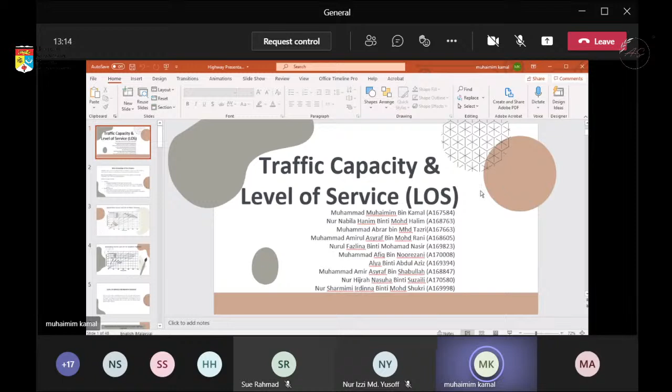Kita mula dengan traffic capacity. Apa yang dimaksudkan dengan kapasiti itu sendiri adalah the maximum number of vehicle in a road that can pass by a given unit time. Usually kita guna kapasiti ni dalam bentuk PCE, which is passenger car equivalent. Kita selalunya akan tukar unit jenis kenderaan tu ke dalam bentuk satu unit, contohnya unit bagi kereta PCE adalah 1.0.

Kemudian bagi level of service, kita takrifkan sebagai maximum hourly rate that can cross a point on the road section according to the road traffic and control condition. Level of service ni ada 6 jenis, mula daripada A sampai ke F, tapi biasanya kita akan gunakan level A sampai level E sahaja kerana level F telah dianggap gagal. Level A merupakan kondisi yang paling optimum kepada pengguna jalan raya kerana aliran trafik adalah paling lancar pada level A.

Bagi silibus yang kami akan present hari ini, kami akan fokuskan pada dua jenis jalan, which is freeway dan juga multi-lane highway. Freeway ni adalah jalan yang didesain untuk kenderaan yang bergerak laju, dan tidak boleh ada sebarang gangguan seperti traffic signal, intersection ataupun at grade crossing. Manakala multi-lane highway merupakan highway yang mempunyai lane lebih daripada dua, boleh ada gangguan dalam bentuk traffic light ataupun light intersection, tapi tak boleh lebih daripada 3 km.

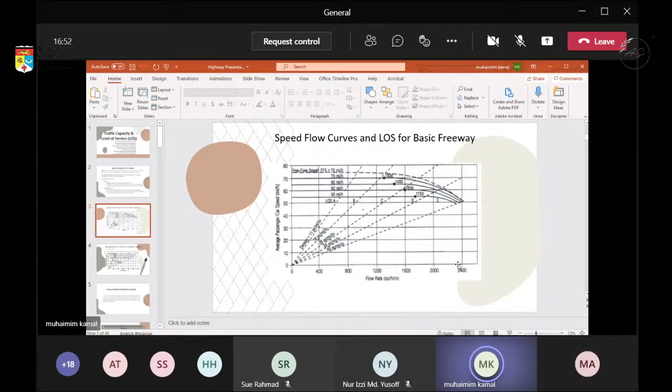Manakala kalau kita tengok pada level of service bahagian E, aliran trafik agak rendah, maknanya ada gangguan dalam trafik dan jalan tersebut tidaklah berapa bagus. Dapat juga kita lihat ada peningkatan bagi flow rate selepas 1300 pc/h/ln, maknanya semakin meningkat flow rate, semakin berkurang average passenger car speed. Lagi tinggi aliran trafik selepas 1300, maknanya kelajuan kenderaan akan semakin berkurang. Ini adalah speed flow curve dan LOS untuk basic freeway.

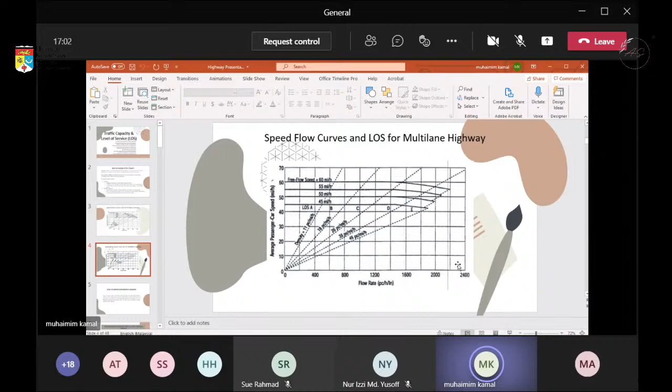Kita juga ada speed flow curve dan LOS bagi multi-lane highway. Jadi kita perlu merujuk kepada graf tersebut untuk kedua-dua jenis jalan. Okay, seterusnya bagi level of service.

Level of service for freeway segment. Level of service is a qualitative measure both of operating condition within the traffic system and how these conditions are perceived by driver and passenger.

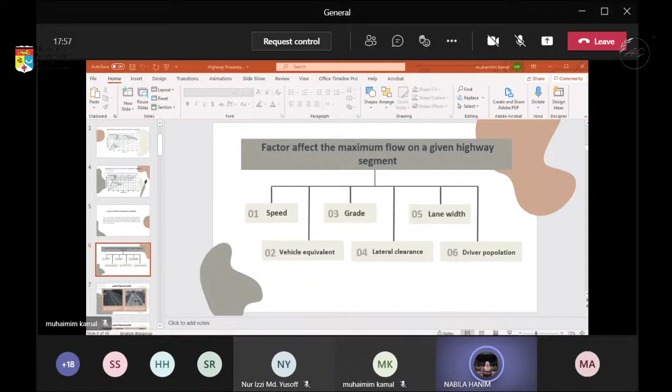There are 6 factors affecting the maximum flow on a given highway segment: speed, vehicle equivalent, grade, lateral clearance, lane width, and driver population.

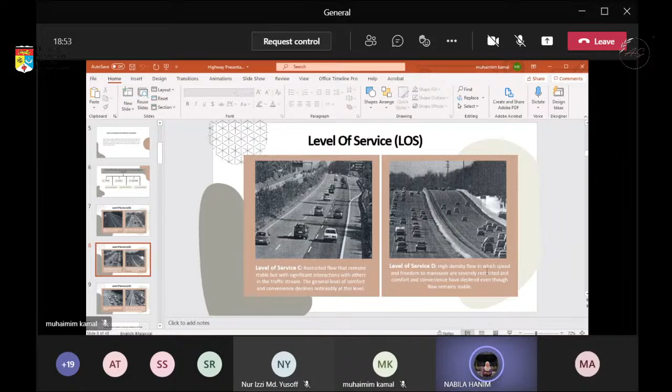For level of service C: stable flow and traffic interaction, so they have a junction. For level of service D: unstable flow, high density, and movement restriction.

For level of service E: unstable flow, lower speed, volume nearly equal to capacity, and little freedom. The last one is level of service F: unstable flow, no freedom, traffic volume can drop to zero, and stop and go.

To calculate the flow rate for a basic freeway section, we use this formula where VP equals 15-minute passenger car equivalent flow rate, V equals hourly peak vehicle volume in one direction, PHF is peak hour factor, N is number of travel lanes in one direction, FP is driver population factor with range of 0.85 to 1.0, and FHV is heavy vehicle adjustment factor.

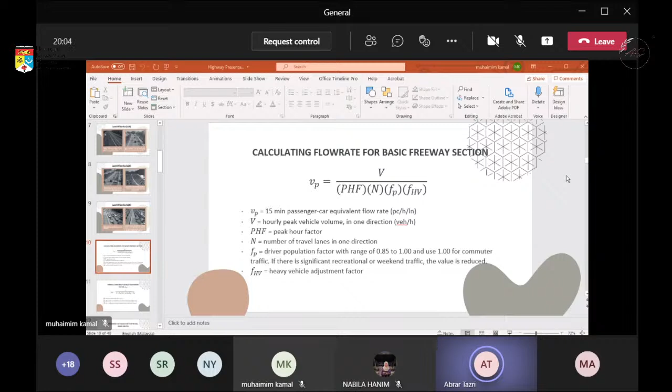To calculate the heavy vehicle adjustment factor, we use another formula where ET is passenger car equivalent for trucks and buses, and ER is passenger car equivalent for recreational vehicle.

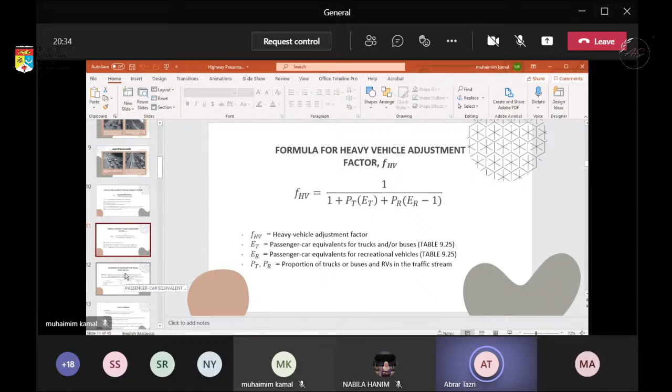To get the passenger car equivalent for truck and buses and recreational vehicle, we use the table in table 9.25. In this table we can see the factor for ET and ER in three types of terrain: level, rolling, and mountainous.

In level terrain, the heavy vehicle can maintain the same speed as passenger cars. In rolling terrain, heavy vehicles reduce their speed lower than passenger cars, but do not travel at crawl speed. In mountainous terrain, the heavy vehicle operates at crawl speed for a significant distance or frequent interval.

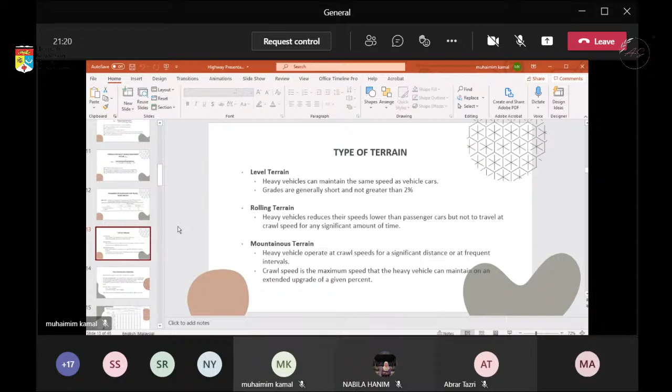For PCEs for specific upgrades: specific grades are analyzed individually for downgrade and upgrade. Passenger car equivalent is used to represent the variant effect of mixed vehicle type on saturation flow by converting a traffic stream comprising of various vehicle types into an equivalent traffic stream comprising entirely of passenger cars. The segment is considered either as a grade of constant percentage or as a series of grades.

The average weight to horsepower ratio for trucks is 55 to 70 kilogram per horsepower. For recreational vehicles, it is 14 to 28 kilogram per horsepower.

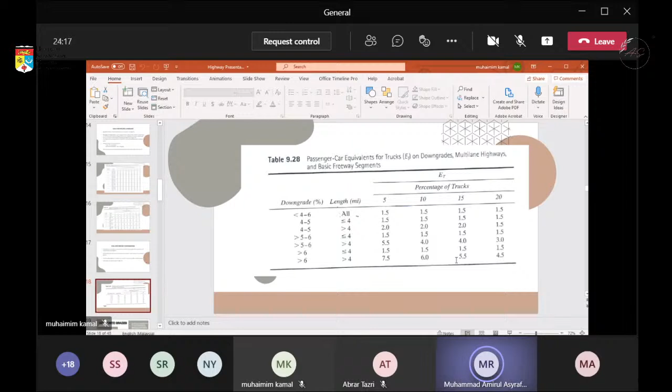For composite grade, when a segment of freeway consists of 2 or more consecutive upgrades with different slopes, the PCE of heavy vehicles is determined using one of two techniques. The first technique determines the average grade of the segment by finding the total rise in elevation and dividing by the total horizontal distance. Use table 9.26 and 9.27.

This is valid for conditions where grades in all subsections are less than 4% or the total length of the composite grade is less than 1,200 meters. The second technique is to estimate the value of an equivalent continuous grade GE. This technique should be used if any single portion of the consecutive grades exceeds 4% or if the total length of grade exceeds 1,200 meters.

Truck acceleration curves are used based on a vehicle with an average weight to horsepower ratio of 90 kg per HP, which represents a somewhat heavier vehicle than the typical truck of 55 to 70 kg per HP used to determine PCE values. Next, this is the example using average grades.

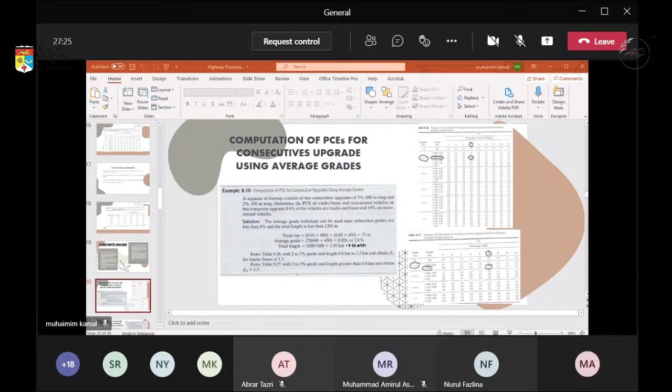The second technique uses the performance curve. Example 9.11: a consecutive upgrade consists of 2 sections, the first of 2% grade and 1,500 meters long, and the second of 6% grade and 1,500 meters long. Trucks comprise 10% of traffic and recreational vehicles comprise 6%. Determine the equivalent grade and the PCEs.

First, since both grades exceed 1,200 meters, the average grade technique does not apply. We use the performance curve. First, plot the 2% curve intersecting with 1,500 meters, which is 5,000 feet, and we got point number 1, which is 75 km per hour, 0.6 miles.

Since 75 km per hour is also the speed of the truck at the beginning of the 6% grade, draw a line horizontally at 75 km per hour that intersects the 6% grade curve, and we got point number 3. The reference distance is located on the horizontal axis at point number 4. Find the point on the horizontal axis that has a value 1,500 meters greater than point 4, and we got point number 5, meaning the distance between number 4 and 5 is 5,000 feet.

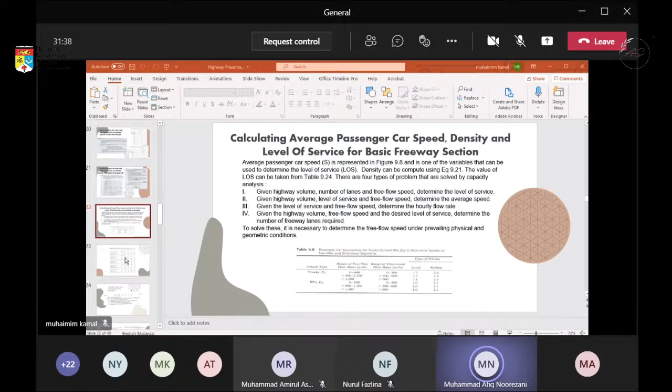This is table 9.24. This table can be used to determine the level of service criteria for basic freeway segments.

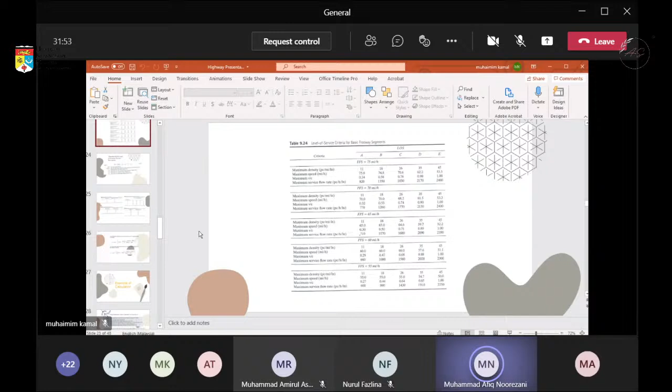Equation 9.23 is used to compute the free flow speed. The equation is FFS equal to BFFS minus FLW minus FLC minus FN minus FID.

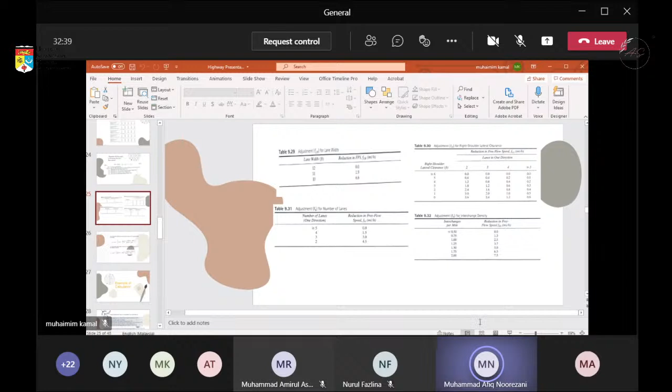The value for FLW can be taken from table 9.29. The value for FLC can be taken from table 9.30. The value for Fn can be taken from table 9.31, and the value for FID can be taken from table 9.32. This is the table used to get the values for Fn, FID, and FLW.

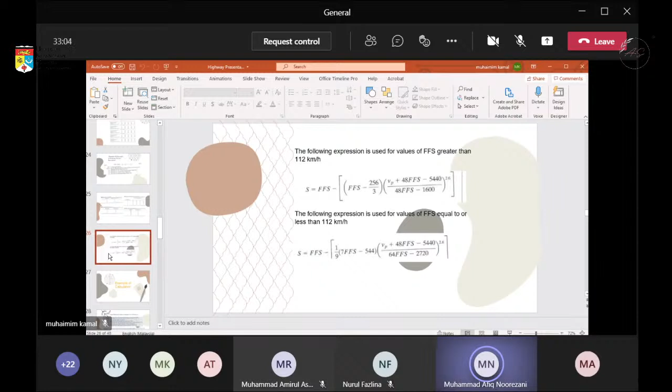There are two equations used to find the value of S. One is for FFS greater than 112 km per hour, and the other is for FFS equal to or less than 112 km per hour.

Next is the example calculation. The first example uses adjustment factors to calculate free flow speed.

The first step is to determine the correction factor using the appropriate table: table 9.29, table 9.30, table 9.31, and table 9.32. The second step is to substitute the adjustment values into equation 9.23 and solve the equation.

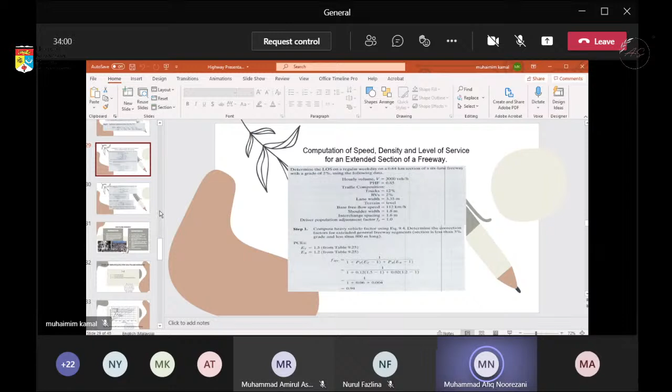The next example is computation of speed, density, and level of service for an extended section of a freeway. The first step is to compute the heavy vehicle factor using equation 9.4 to determine the correction factor for the extended general freeway segment.

The next step is to use equation 9.22 to determine the peak 15-minute passenger car equivalent flow rate. The third step is to compute the free flow speed and density using equation 9.23, and the last step is to use figure 9.8 or table 9.24 to determine the level of service.

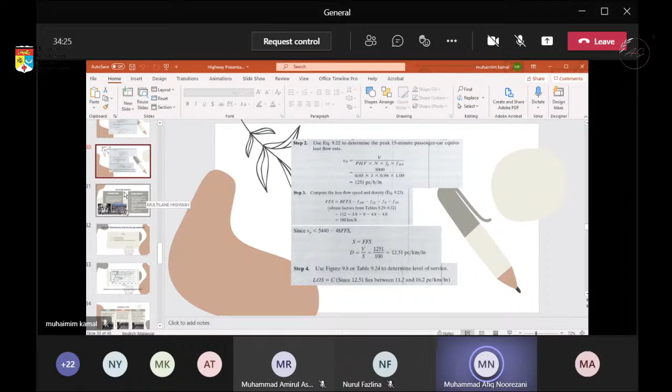Next is about the multi-lane highway. A multi-lane highway is a highway with at least two lanes for the exclusive use of traffic in each direction, with no control or partial control of access, but that may have periodic interruption to flow at signalized intersections not closer than 3 km.

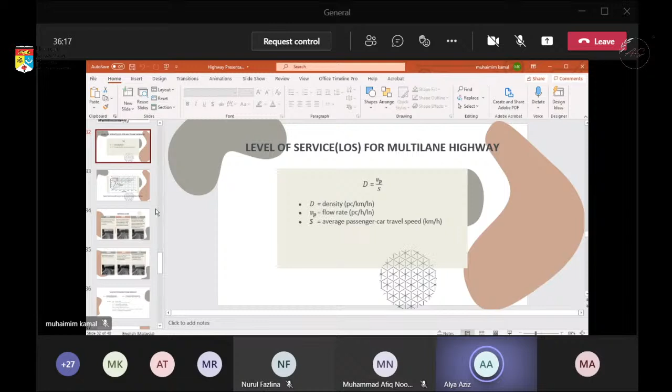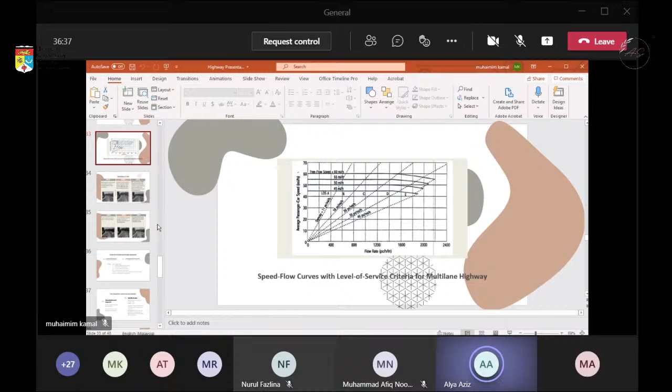This is the definition of level of service. Level A represents free flow at low concentration with no restriction due to traffic conditions. Level B is the lower limit often used in the design of rural highways, the zone of stable flow with more marked restriction.

Level C denotes the zone of stable flow with more marked restriction on the driver's selection of speed and with reduced ability to pass. Speed is reduced when exceeding 80 km per hour.

Level D reflects little freedom for driver maneuverability. Level E has low operating speed and volume near or at capacity, which is the area of unstable flow. Level F is characterized by familiar traffic jams with frequent interruption and breakdown of flow.

Level of service, what does it stand for? Level of service. Alright, continue.

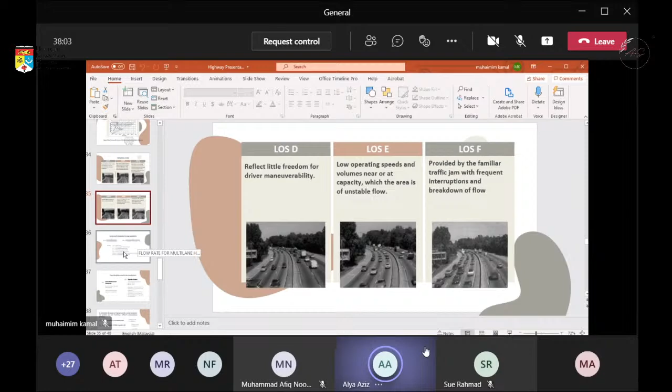Okay, next. Here is the calculation for the flow rate for multi-lane highway. Basically it's the same as freeway highway, but next please.

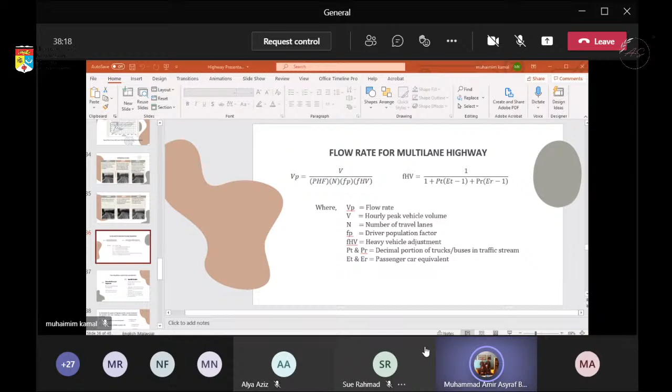There are two situations to be considered. First, extended general segment, where the terrain is level, rolling, or mountainous. The second situation is specific graded, defined by segment.

The value of ET and ER can be obtained from table 9.25. For specific graded, there are two grades: upgrade, where the value of ET and ER can be obtained from table 9.26 and 9.27; and downgrade, where the value of ET can be obtained from table 9.28, and RV are treated as if they were on level terrain.

To determine the grade of the highway profile, several situations are possible, each involving a different computational technique. First, for a constant grade highway profile, compute using G equal to 100 times H over L, height over length.

Second, if segment length is below 1,200 meters or graded less than 4%, compute using average grade. Third, if segment length is 1,200 meters or above, or grade above 4%, use the truck performance curve.

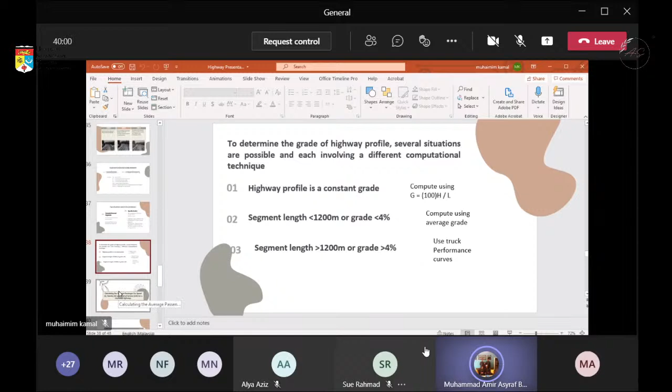Okay, calculating the average passenger car speed, density, and level of service for a multi-lane highway. The first step is to compute the value of free flow speed using equation 9.25, as shown here.

Our second step is to compute the value of flow rate in units of passenger cars per hour per lane, using equation 9.22.

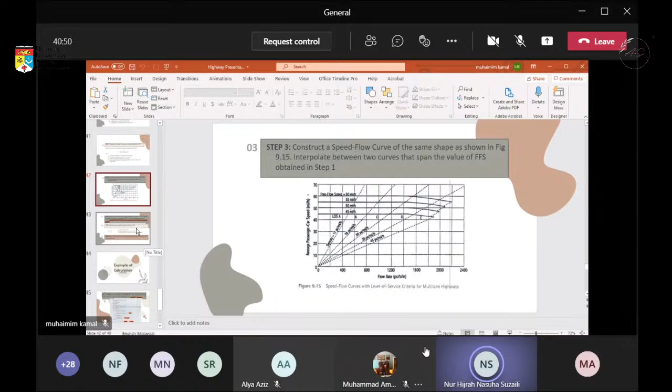The third step is to construct a speed-flow curve of the same shape as shown in figure 9.15, then interpolate between two curves that span the value of FFS obtained in step 1.

Step 4 is to determine the average passenger car speed, read from the flow rate obtained in step 2 to the intersection of the FFS curve. Remember that if the flow rate is 1,400 passenger cars per hour per lane or less, the value of S is the same as FFS.

Step 5 is to compute the density using equation 9.21. The last step is to determine the level of service, using the density computed in step 5 and entering table 9.33.

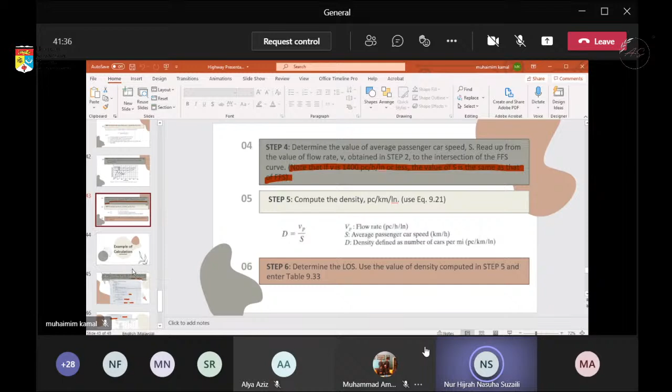Next is an example calculation. A 960 meter segment of a 5.2 kilometer 4-lane undivided multi-lane highway in a suburban area is on a 1.5% grade. The highway is in level terrain with lane widths of 3.35 meters. The free flow speed is 73 km per hour. The peak hour volume is 1,900 vehicles per hour, the peak hour factor is 0.9, with 30% trucks and 2% RVs. Determine the level of service, speed and density for upgrade and downgrade.

The first step is to determine the free flow speed, but we don't need to find it because it is already given in the question: 73 km per hour.

The second step is to determine the flow rate using equation 9.22. We input the given data into the flow rate formula and get 1,129 passenger cars per hour per lane. Then we find the average speed, but since our flow rate is below 1,400 passenger cars per hour per lane, our average speed is the same as free flow speed, which is 73 km per hour.

Then we compute the density from equation 9.21, flow rate divided by average speed, and we get 15.5 passenger cars per kilometer per lane.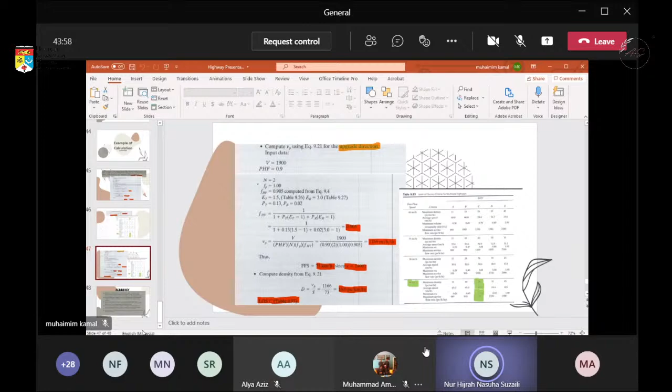For the summary, highway and traffic engineers are frequently engaged in evaluating the performance of different highway facilities, including freeway segments, intersections, ramps, and other highway elements. The level of service is a measure of how well the facility is operating. It is both a qualitative measure of motorist perceptions of operational conditions and a measure of the density of vehicular travel.

A primary objective in highway and traffic engineering is to provide highway facilities that operate at levels of service acceptable to the users. Regular evaluation of the level of service at these facilities helps engineers determine whether acceptable conditions exist and identify locations where improvement may be necessary.

Levels of different operating conditions are assigned to varying levels of service, ranging from level of service A to level of service F for each facility. These operating conditions are also related to the volume of traffic that can be accommodated by the specific component, and hence related to the capacity of the facility.

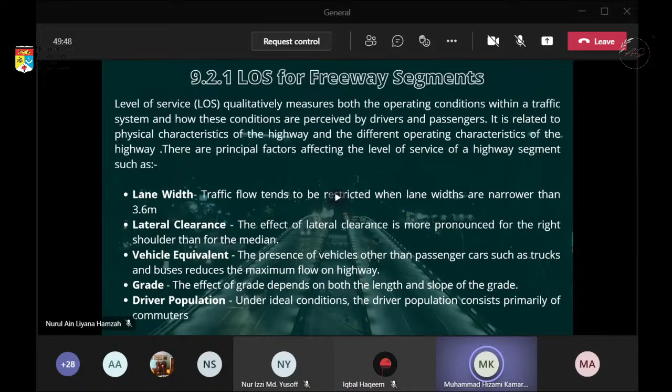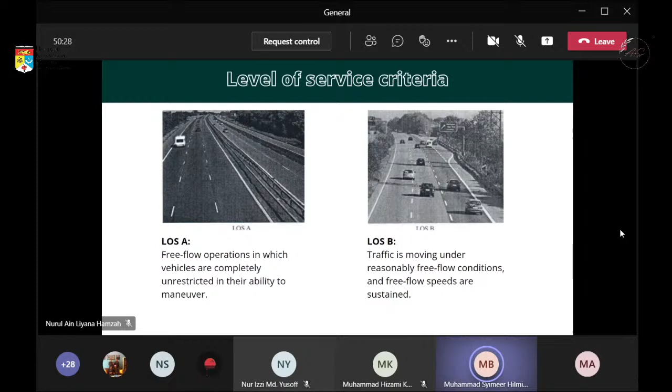At this level, flow operating space begins to be restricted by traffic conditions, where there is reasonable freedom to select speed and lane. The lower limit at this level is the lowest speed and highest volume, which is then associated with service volume in the design of rural highways.

LOS C: speeds are at or near the free flow speed, but freedom to maneuver is noticeably restricted. At this level, drivers are restricted regarding speeds, lane changes, and overtaking maneuvers. A relatively satisfactory operating speed can still be obtained, with service volume suitable for urban design practice.

For LOS D, speeds can begin to decline slightly and density increases more quickly with increasing flows. At this level it approaches unstable flow because the operating speed is tolerable but considerably affected by changes in operating conditions. Drivers also have little freedom to maneuver.

LOS E: operations are volatile because there are virtually no usable gaps. This level can be determined by volumes near highway capacity. The typical speeds used in this level are approximately 50 km per hour. Flow is unstable and there may be stoppages of short duration. Lastly, LOS F: operation is under breakdown conditions in vehicular flow. These conditions prevail in queues behind freeway sections experiencing temporary or long-term incapacity. In short, level of service A is the highest, while level of service F is the lowest.

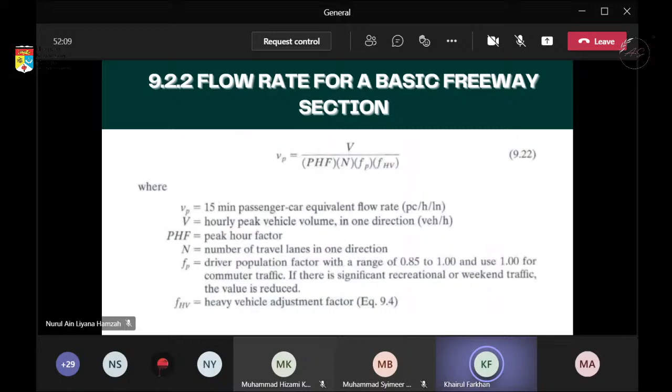Next is the passenger car equivalent, known as PCE. PCE is a metric used in engineering to assess traffic flow rate on a highway. PCE for trucks can be defined by 3 grade conditions: general freeway segment, specific upgrade, and specific downgrade. PCE by truck can be affected by the type of terrain.

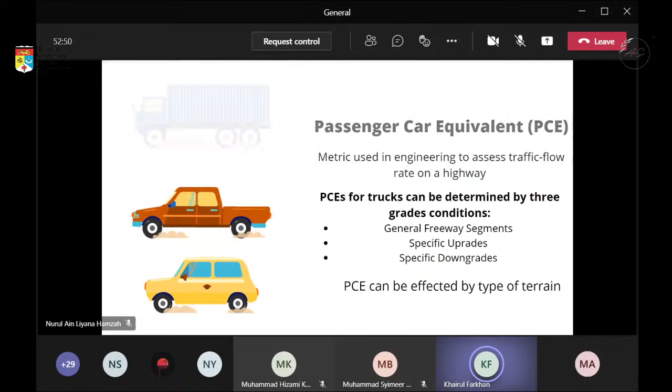For the type of terrain, there are 3: level terrain, rolling terrain, and mountainous terrain. For level terrain, the condition of grades and horizontal alignment allows trucks to maintain the same speed as cars. This is rolling terrain, where the condition of grade and horizontal alignment causes trucks to reduce speed below that of cars, but not to crawl speed. This means the road is slightly inclined. The last one is mountainous terrain.

The combination of grades and horizontal alignment causes trucks to travel at crawl speed for significant distances, which means the road is in an inclined position.

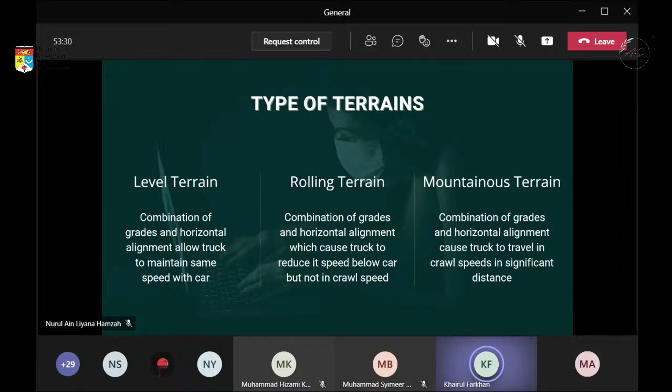So the next one is a standard general freeway segment. It is first grade condition. The characteristic occurs when a single grade is not too long or steep to have significant impact on capacity. Grades of at least 3% and less than 400 meters, or the last one, grade less than 3% and less than 800 meters.

For the PCE value, it depends on the type of terrain as shown in table 9.25, which gives the factor and type of terrain. The factors are trucks and buses, as well as RV, recreational vehicle, or ERV. The type of terrain can be level, rolling, and mountainous.

So the next one is specific upgrade. The characteristic is freeway grade of 3% or more and longer than 400 meters, or a grade of at least less than 3% and longer than 800 meters. The average weight to horsepower ratio is for truck 55 to 70 kilograms per 1 horsepower, and for car 14 to 28 kilograms per 1 horsepower, which means a truck needs more horsepower than a car to move them.

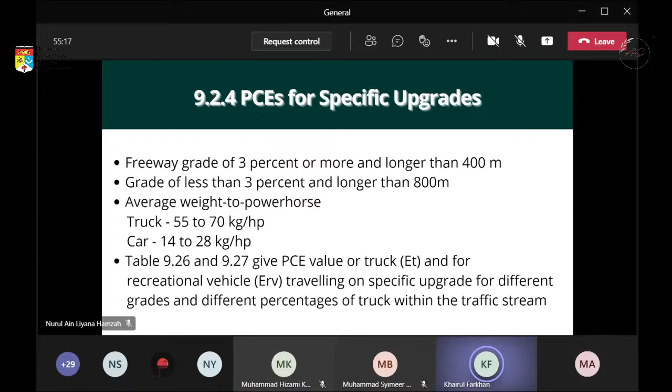Tables 9.26 and 9.27 give the PCE value for trucks as well as RV, and for the recreational vehicle traveling on specific upgrade, for different grades and different percentages of trucks within the traffic stream.

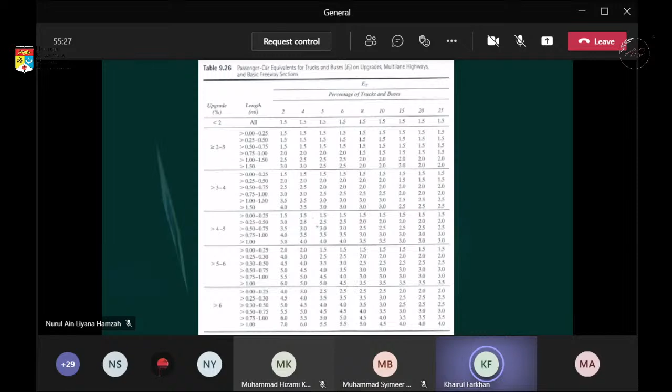So this is table 9.26, for truck PCE. And this is table 9.27, PCE for RV, recreational vehicle.

So the last one is PCE for specific downgrade. If the downgrade is not severe, treat it as if it were a level segment. If the downgrade is severe, the effect on car equivalent is greater, as shown in table 9.28. This is for PCE for the truck on downgrade. As the truck has to downshift, the effect on car equivalent is greater. The downgrade severity depends on whether the truck requires to shift gear or not.

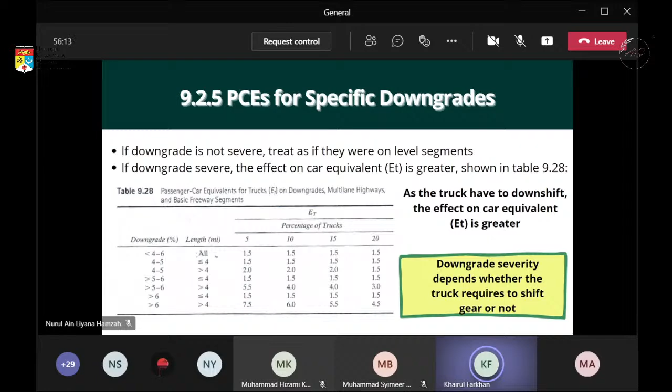Thank you, Khairul. Can everyone hear me? Yes, yes, yes.

Thank you. So for my next part, I will be explaining the PCE for composite grades. So what is actually a composite grade? It is a freeway segment that consists of 2 or more consecutive upgrades with different slopes.

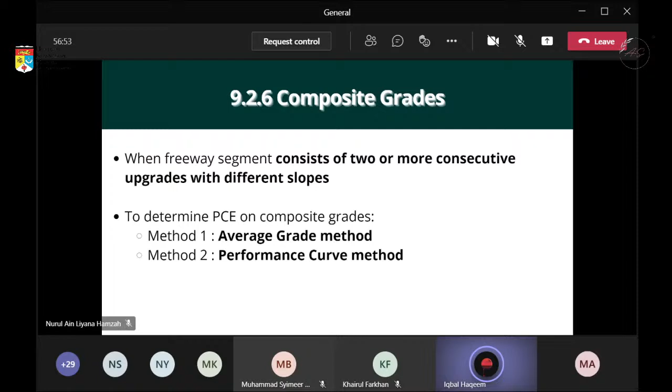So in order to determine PCE on composite grades, there are 2 methods: the first is the average grade method, and the second is the performance curve method.

For the first method, the average grade method, we need to satisfy the condition first. It is used when the grade in all subsections, meaning both segments, are less than 4%, and the total length of the composite grade is less than 1,200 meters. When the condition is satisfied, then we can use this method.

So how do we use it? First, we need to determine the average grade of the segment, which equals the total rise in elevation divided by the total horizontal distance. Then we use the average grade with table 9.26 and 9.27 to get the truck PCE and the recreational vehicle PCE. I will show the example later.

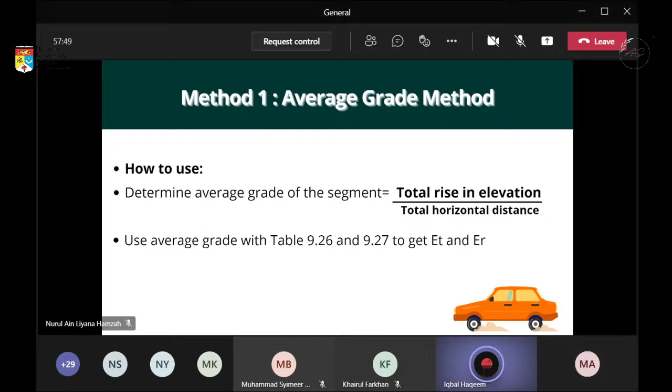This is table 9.26, which Khairul already mentioned. This part is already mentioned as well.

So for the first example, using the average grade method, let's read the question first. A segment of freeway consists of 2 consecutive upgrades of 3% and 600 meters long, and 2% and 450 meters long. We need to determine the PCE of truck and recreational vehicle on this composite upgrade if 6% of the vehicles are trucks and buses and 10% are recreational vehicles.

So in order to solve this problem, we need to identify what kind of condition applies. In this case, the average grade technique can be used because the subsection grades are less than 4% and the total length of both segments is less than 1,200 meters.

First, as mentioned before, we need to find the total rise. Total rise is the grade percentage times the distance. So, 0.03, the percent for the segment, times the length, and then we add both segments together, giving us 27 meters. Then the average grade is the total rise divided by the total distance, giving us 2.6%.

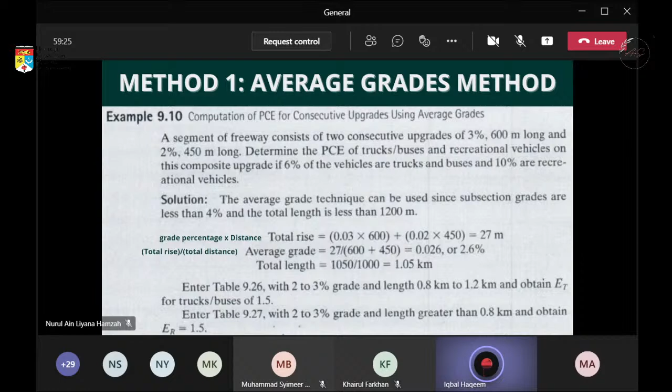The total length is just the total length divided by 1,000 to get it in kilometers. So, next slide.

To use table 9.26, our upgrade is 2 to 3%. I forgot to mention this table is in miles, so we need to convert it into kilometers. Based on our answer before, 1.05 kilometer is equal to 0.65 miles. So our length is within 0.5 up to 0.75, and the percentage of trucks and buses is 6%. So we get our ET is 1.5.

Next slide. Our grade is 2 to 3%, same as before. Our length is far greater than 0.5 miles, and our percentage of RV is 10%. Then we get our ER is 1.5. Next slide, please.

For the second method, there is also a condition we need to satisfy first. We use it if any single of the consecutive grades exceeds 4%. This means that if there are two segments, and if any single segment exceeds 4%, then we automatically need to use this method. Also, if the total length of the grade exceeds 1,200 meters, then we use this performance curve method. Next slide, please.

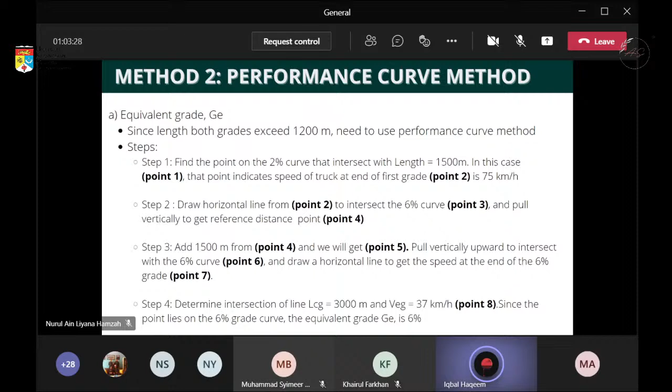Then we add 1,500 meters from point 4 to get point 5. We pull vertically upward to intersect with the 6% curve, which is point 6, and draw a horizontal line to get the speed at the end of the 6% grade, which is point 7. The last step is to determine the intersection of line LCG, which is 3,000 meters, and VEG, equal to 37 km per hour, that's point 8. Since the point lies on the 6% grade curve, the equivalent grade GE is 6%. Next.

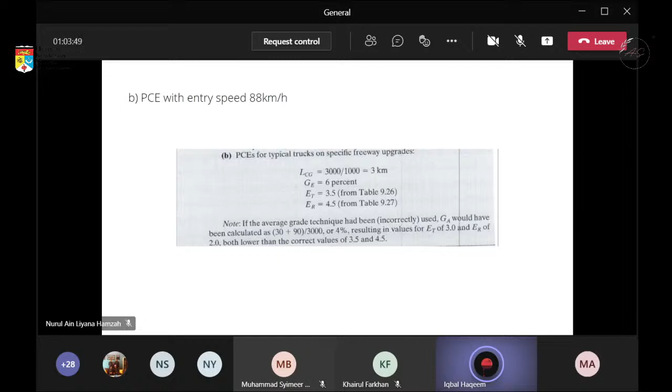Now we need to find the PCE with the entry speed at 88 km per hour. We already calculated our length is 3 km and our equivalent grade is 6%. Then we use table 9.26. Next slide.

Using table 9.26, our upgrade is within 5 to 6%, our length is more than 1 mile, and our percentage of trucks is 10, so we get our ET is 3.5. Next slide.

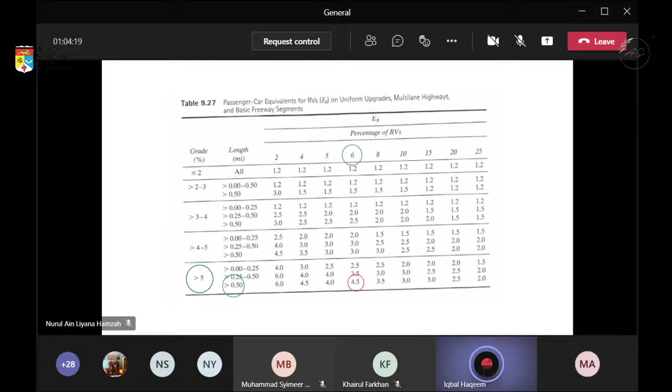Our grade is more than 5%, our length is more than 0.5, and our ER is 4.5. Next slide, thank you.

This is about average passenger car speed, density, and level of service for a basic freeway section. For capacity analysis, we need to compute VP, the flow rate, to find average passenger car speed, then compute the density and find the corresponding LOS in the table. Next.

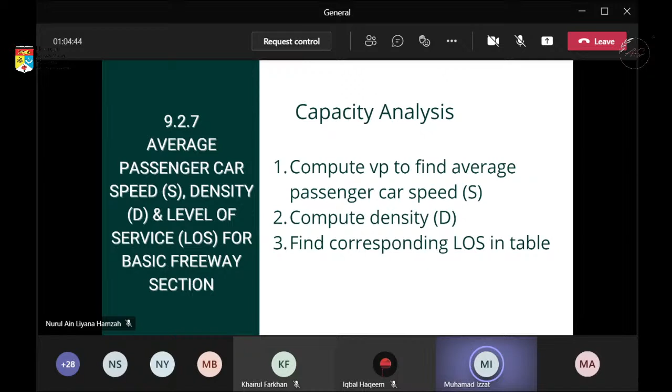Okay, this is the free flow speed equation, which is base free flow speed minus the adjustment for lane width, right shoulder lateral clearance, number of lanes, and interchange density.

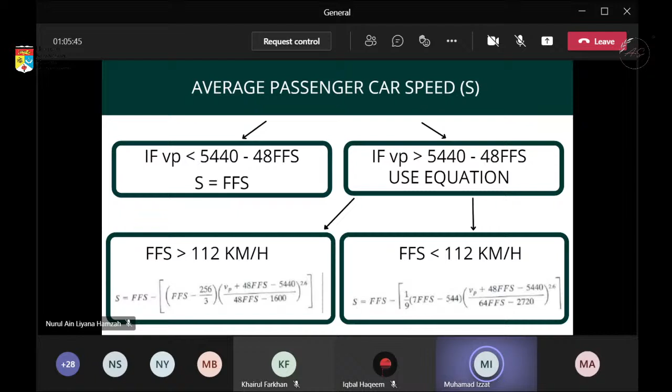For average passenger car speed, we have two equations. If the flow rate is lower than 5440 minus 48 FFS, we take S as the same number as the FFS. But if the flow rate is higher than 5440 minus 48 FFS, we need to use these two equations on the left side. If the FFS is higher than 112 km per hour, we use the equation on the left side, and if the FFS is lower than 112 km per hour, we use the equation on the right side.

Okay, for the adjustment of lane width at the left side: if the lane width is below 3.6 meters, we use the adjustment as the table below. If the value of the lane width is in between these numbers, we need to use interpolation to get it. But if the lane width value is higher than 3.6, we just use 0 as the adjustment. Same as the right hand side.

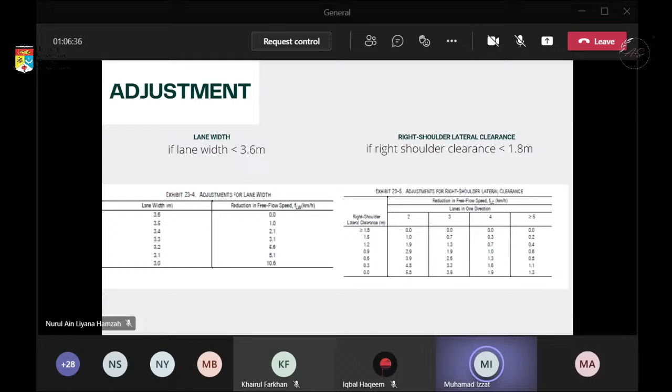So it is for right shoulder lateral clearance. If the right shoulder clearance is below 1.8, we use the value at the table below.

This is the adjustment for number of lanes. If the number of freeway lanes in one direction is below 5, we use the table value on the left side. For the interchange density, if interchanges per kilometer is higher than 0.3, we use the table on the right side.

Moving on to example 9.12. For this example, they give us the base free flow speed and the data of the freeway section. The first step is to apply the correction factors for the data of the freeway section, and then we substitute the base free flow speed and the adjustments made into the free flow speed equation, and then we get 94.3 km per hour.

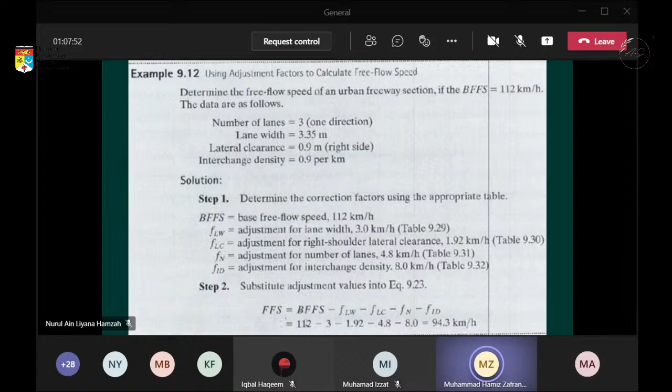For example 9.13, we need to determine the level of service based on example 9.12. If the flow rate is 725 passenger car per hour per lane, we use the density equation to find the density, and refer to the LOS table.

Since our VP is less than 5,440 minus 48 FFS, we can assume that the speed is equal to the free flow speed, and then we can substitute it into the density equation, which is VP over S, 725 over 94.3, to get 7.69 passenger car per kilometer per lane. Then we can refer to the graph or the table in the next slide.

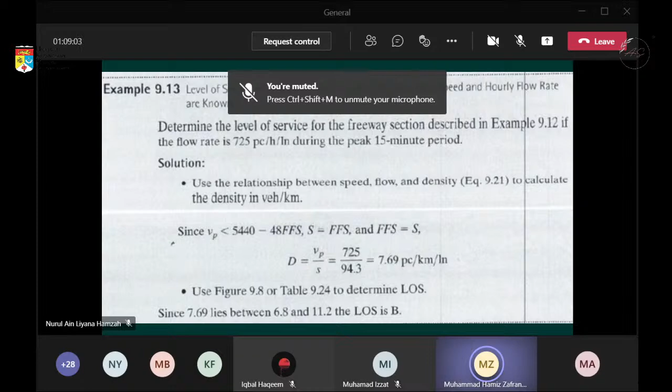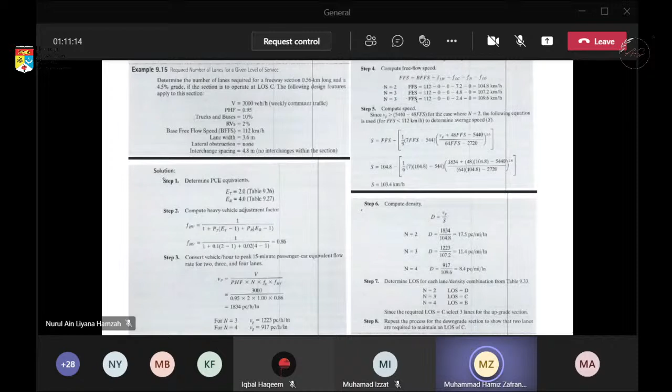Next example 9.15. We need to determine the number of lanes for LOS. First step is to determine the PCE, passenger car equivalent of trucks and RVs, based on table 9.26 and 9.27. We get 2 for trucks and 4.0 for RV. Then we substitute it into the heavy vehicle factor equation, and we get 0.86.

For the flow rate, we need to use the flow rate equation, but we need to take into account that we are finding the required number of lanes. So we use n equals 2, n equals 3, and n equals 4 respectively. We get 1,834 passenger car per hour per lane for number of lanes equals 2; for n equals 3, flow rate is 1,223 passenger car per hour per lane; and for n equals 4, the rate is 917 passenger car per hour per lane.

Next step, we use the free flow speed equation and the adjustments made, and then we get the own free flow speed for each lane configuration, and then we compute the speed.

Moving on, I will explain about multi-lane highways. A highway is a public road, especially a major road connecting 2 or more destinations. A multi-lane highway is a highway with at least 2 lanes for the exclusive use of traffic in each direction, with no control or partial control of access, but that may have periodic interruption to flow at signalized intersections not closer than 3 km. They are typically located in suburban areas leading to central cities or along high volume rural corridors that connect to cities or important activity centers that generate a considerable number of daily trips.

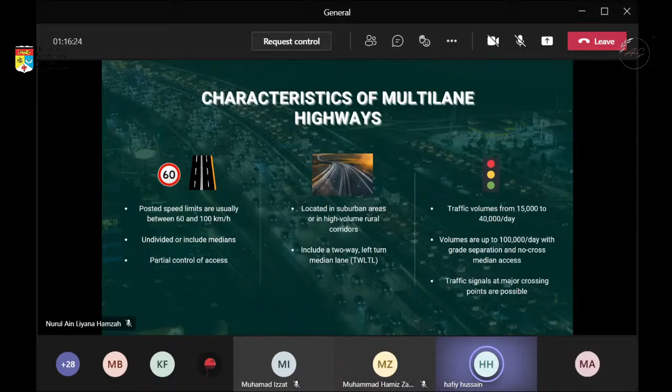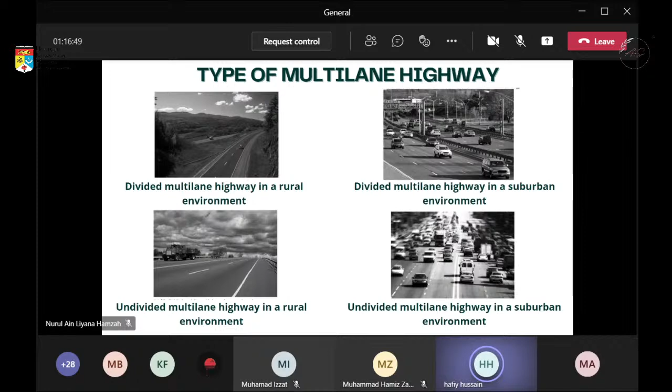This type of multi-lane highway, first is a divided multi-lane highway in a rural environment. Second is divided multi-lane highway in a suburban environment. The third one is undivided multi-lane highway in a rural environment, and lastly is undivided multi-lane highway in a suburban environment. Next.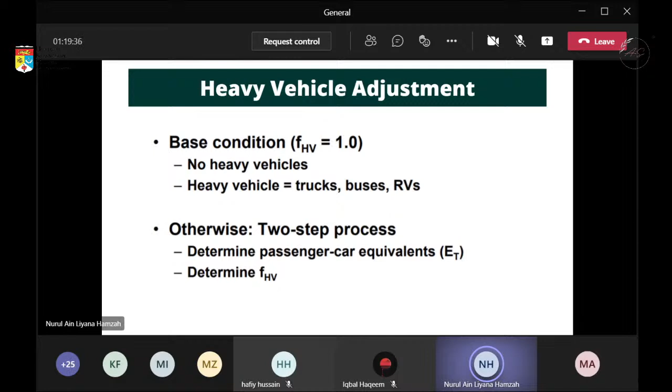So this is the formula for the heavy vehicle factor. Finding FHV requires you to find the equivalent truck factor, ET, and recreational vehicle factor, ER, to compute the adjustment factor.

Two situations need to be considered. The first one is a standard general segment type of terrain. For an extended general segment analysis, the terrain of the highway must be classified as level, rolling, and mountainous. The values of ET and ER can be obtained in Table 9.25.

The next one is specific grades. Any highway grade of more than 1.6 km for grade less than 3%, or 0.8 km for grades of 3% or more, should be considered as a separate segment. Analysis of such segments must consider the upgrade and downgrade conditions. The value of upgrade ET and ER can be obtained in Table 9.26 and 9.27, while the value for downgrade ET can be obtained in Table 9.28.

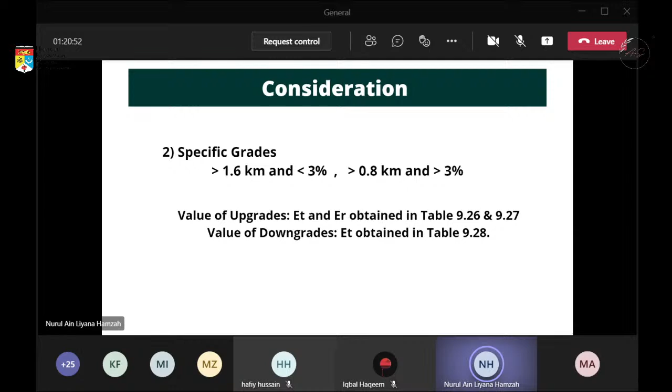To determine the grade of the highway profile, three situations are possible. The first one is the highway profile is in constant grade, where we can use equation 9.24. The highway profile may also consist of two or more segments of different grade, so the value of grade for the analysis segment is determined for two possible conditions: first, segment length is less than 1,200 m or grade is less than 4%, in which case we use equation 9.24.

Second, segment length is more than 1,200 m or grade is 4% or more, in which case we use Figure 9.13 and the performance curve solution. Next.

For average passenger car speed, density and level of service, the following steps are used to calculate the average passenger car speed. Step 1, compute the value of free flow speed by equation 9.25. Step 2, compute the value of flow rate.

Step 3, construct a speed-flow curve of the same shape, then interpolate between two curves that span the value of free flow speed obtained in step 1. Moving to step 4, determine the value of average passenger car speed, read out from the value of flow rate obtained in step 2 to the intersection of the free flow speed curve.

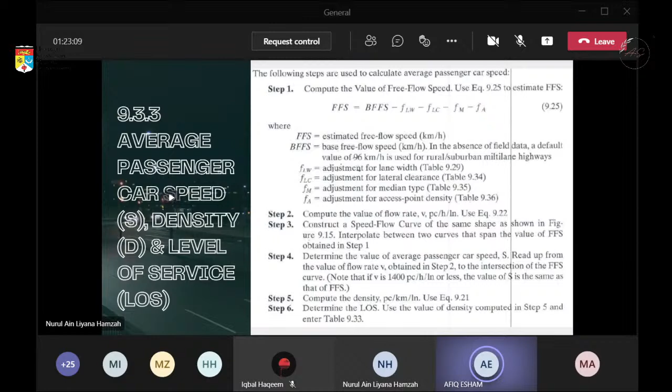So in example 9.16, determine the level of service, speed and density for upgrade and downgrade. Okay, first...

We compute the flow rate using equation 9.4 and 9.22. Then we compute the free flow speed.

Since the free flow speed is measured, no computation is required. Then we estimate the free flow speed, and we can estimate the speed and then the density.

Using equation 9.21, then determine the level of service, referring to table 9.33.

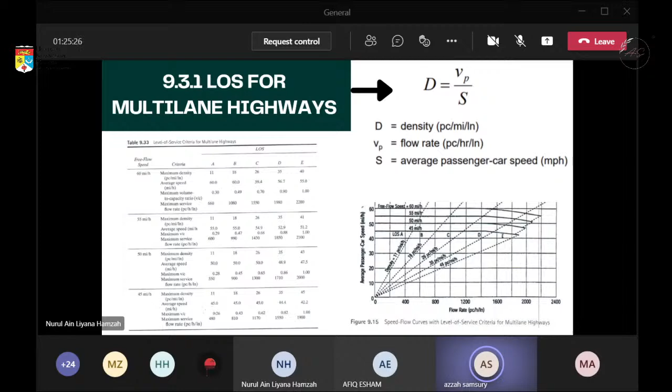So for this multi-lane highway, we have level of service from A through F. The level of service from A to F can be seen and defined in the table.

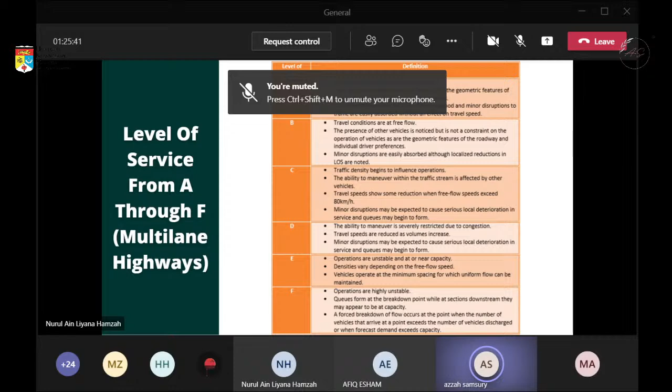Okay, so for calculation, we have flow rate. We need to determine the flow rate to get the FFS, free flow speed. The flow rate in passenger cars per hour per lane for a multi-lane highway is computed using equation 9.22.

The hourly flow rate must reflect the influence of heavy vehicles, the temporal variation of traffic flow over an hour, and the characteristics of the driver population. These effects are reflected by adjusting hourly volumes or estimates, typically reported in vehicles per hour, to arrive at an equivalent passenger car flow rate in passenger cars per hour.

The equivalent passenger car flow rate is calculated using the heavy vehicle and peak hour adjustment factor, reported on a per lane basis. The peak hour factor represents the variation in traffic flow within an hour. Observations of traffic flow consistently indicate that the flow rates found in the peak 15-minute period within an hour are not sustained throughout the entire hour.

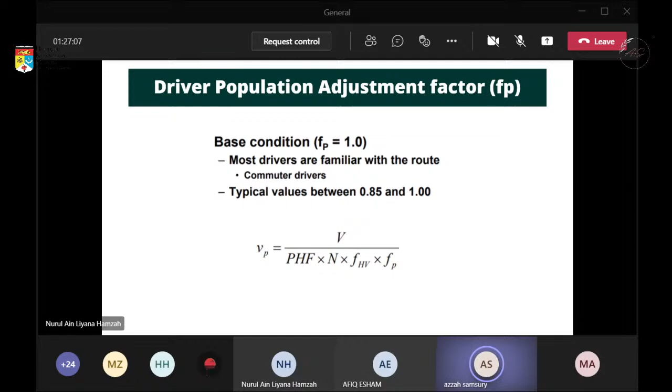Next. Okay, for the summary, before this slide... Liyana, hello. Yeah.

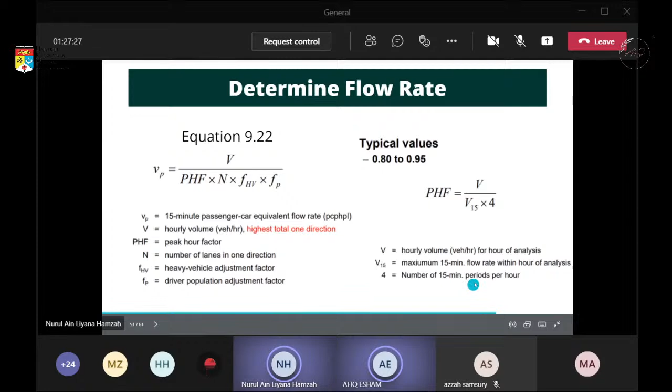Okay, for the summary, highway and traffic engineers are frequently engaged in evaluating the performance of different facilities of the highway system. These facilities include freeway segments, intersections, ramps, and other highway elements.

The level of service is a measure of how well the facility is operating. It is both a qualitative measure of motorist perception of the operational conditions existing on the facility, as well as a measure of the density of vehicular travel.

A primary objective of highway and traffic engineers is to provide a highway facility that operates at a level of service acceptable to the users of those facilities. Regular evaluations of level of service at the facilities will help engineers determine whether acceptable conditions exist and to identify those locations where improved elements may be necessary.